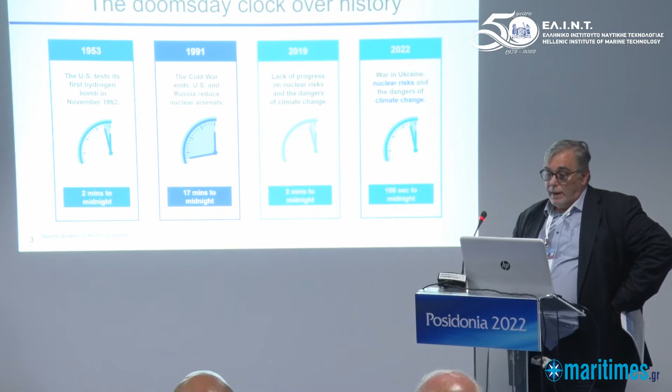In 1953, the main issue was the atomic bombs, hydrogen bombs, and at that time we had 2 minutes to midnight. Next was the Cold War, 1991, with 17 minutes to midnight. Next was 2019 with the nuclear treaty, that was 2 minutes, and in 2022 what they have said is that the Ukraine war risk and climate change give us 100 seconds to midnight. You understand what is the size of the seconds in this for them.

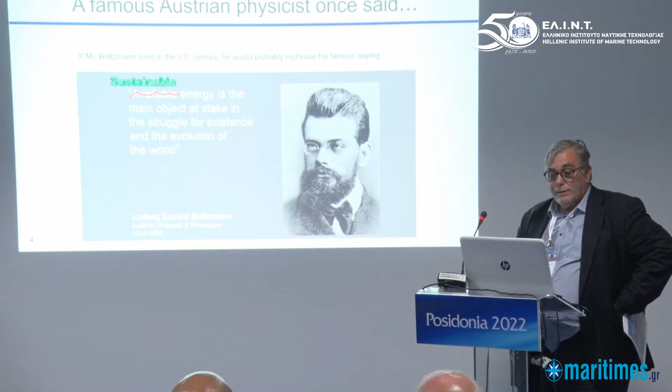Long ago, it was said that the available energy is the main object at stake in the struggle for existence and the evolution of the world. That was somewhere between 1844 and 1906. If we change the first word in this saying to 'sustainable,' I believe this is what we are faced with today.

We are at the turning point. There have been a number of conferences discussing climate. We had the Paris Convention, we had the Glasgow meeting, and we had the Davos meeting very recently.

We have an estimation that was done a long time ago by Gabrieli and von Karman. What they have said, and what we believe as people of the shipping industry, is that shipping is the most efficient and less polluting form of transport, in terms of emissions.

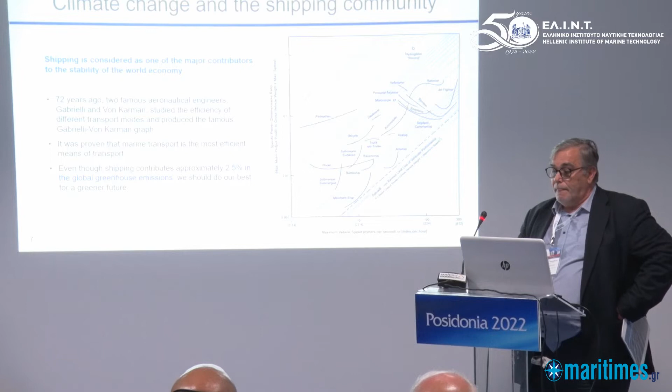We have the SOx emissions. This has already passed, but it's still recently we see a revival of the intention to fit scrubbers. The main reason for this is the price differential between low sulfur and high sulfur fuel. We have the NOx emissions, which are creating quite a few technical issues for the designers and manufacturers of the engines. And we have greenhouse gas emissions, which in my opinion is the most serious issue and the one that has to be tackled first.

There are a number of goals set up by IMO. Unfortunately, the IMO, number one, is a slow organization. Number two, their work was affected a lot by COVID, because they could not have face-to-face meetings and had to work in groups. But these are the measures that were announced a long time ago, and that are still on the agenda of IMO. We have the Energy Efficiency Design Index for new ships.

I calculated, just for fun, the EEDI of the Titanic and the EEDI of the Liberty ships. We go down from 55 to 24 with the Liberty ships. Then we have a very interesting ship, the Europe in 2002. That was a ULCC delivered 20 years ago that could meet the EEDI requirements of today. The reason for this was that the ship was large.

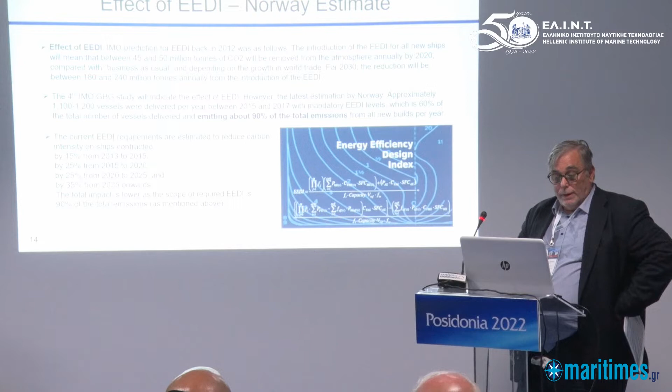450,000 deadweight. You can see some calculations for ships that are being delivered more recently. This is the same table form. The effect of EEDI as calculated by Norway, not a very recent calculation, but their estimation was 15% to 2015, 25% to 2020, and 35% to 2025.

EEXI, I think it's the discussion of the day, because it will take effect soon. What you can see on the table is what is required for different ships, different designs of ships. And this is the CII, and we have to say it is the first time that ships are ranked depending on their actual emissions. It's not a design index, it's an operational index.

This is an estimation from ABS on how the EEXI will affect the existing fleet. 82% of the bulk carriers have to do something, 80% of gas carriers, and 78% - sorry, I'm reading the CII. For the EEXI, it's 87, 88, 85, and 95, a little less for the CII and a little less for the different categories of ships.

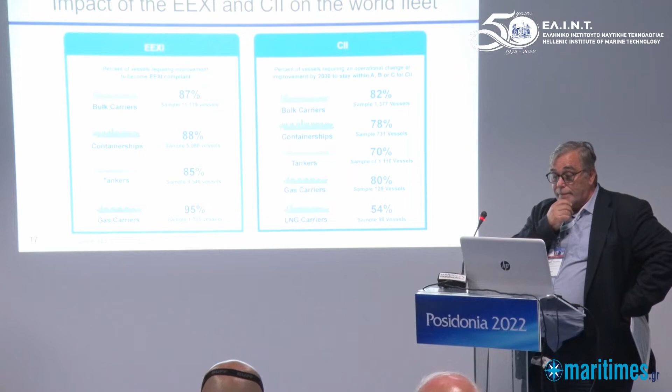What are the prospects? One of the problems we have is that apart from the CII, the whole industry has to improve. To 2050, it's 30-50% or 40-70% per ship, as IMO has said.

Prospects for population growth - although yesterday a report was published saying all these have to be revisited - but according to the latest projection by the United Nations, the population of the planet will increase by 22.52% to 2050.

I was in a seminar maybe two years ago with a few oil majors, and they were all smiling. When I asked them why they smile, they replied: because we estimate that energy consumption will go up, not go down.

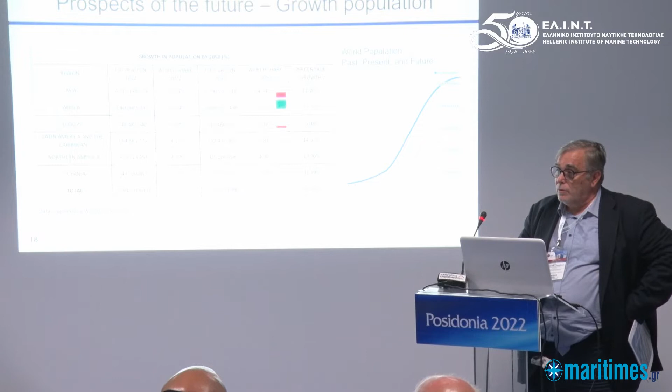So this is the future growth. You can see it also by continent. Europe will go down, Africa will go up a lot, South America is projected also to go up. And the Australians cannot keep their population at 22 million for a whole continent - it will also go up.

These are the projections against the United Nations for the seaborne trade. Some sectors, especially the tanker sector, are forecasted to diminish. Bulk carriers - they say the seaborne trade will increase. Containers will increase a lot. Gas carriers will increase a lot. The total growth is about 25%.

And this is not helping the industry, if the targets are set by industry and not by ship. GDP growth - who can talk about GDP today? I don't know, but these are the projected numbers.

Alternative fuels - I'll focus a bit on alternative fuels, and I will not talk about regulatory issues because they will be covered by the other speakers. What we have to evaluate today is 12 different solutions for ship propulsion. Keep in mind that for the past, around 70 years since coal stopped being used as the main fuel for ships, we have basically had one fuel, or say two fuels: MGO, distillates, and heavy fuel.

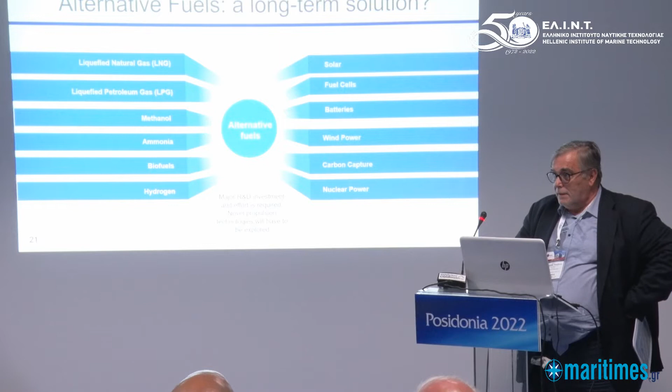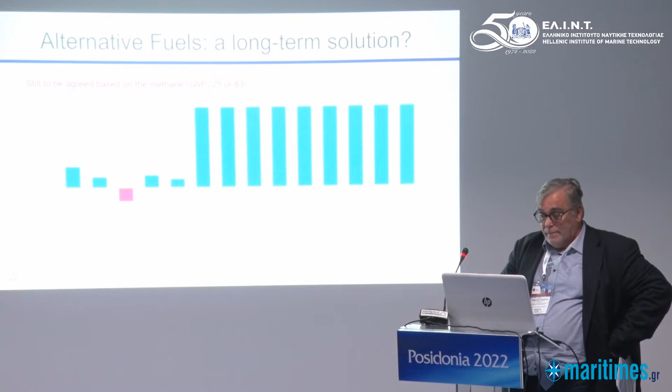Energy density, the properties of the new fuels - there are big differences between them. As an example, hydrogen will need 4 times more space to store, if you can store it at a temperature of -253 degrees.

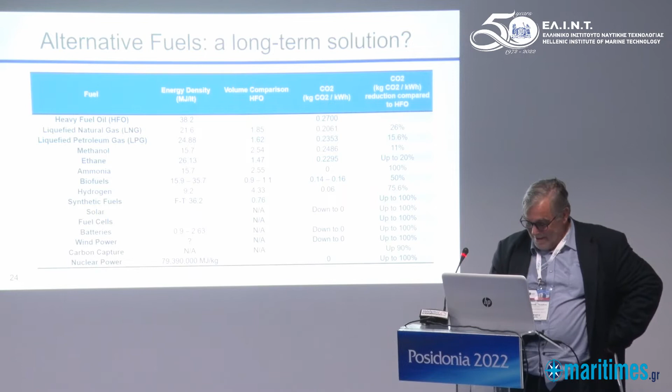Liquefied natural gas - some people like it, some people hate it, I'm not going to mention names. But it seems that it is the closest solution to improving emissions today. I believe that LNG is a transient fuel. It's becoming different if we talk about blue LNG, green LNG, or what can be developed in the not so far future.

LPG - I don't think LPG will help in my view. It's only about 15% reduction in greenhouse emissions. But LPG may be a solution for LPG carriers, and there are ships on order today, a few of them already delivered, that are using LPG successfully.

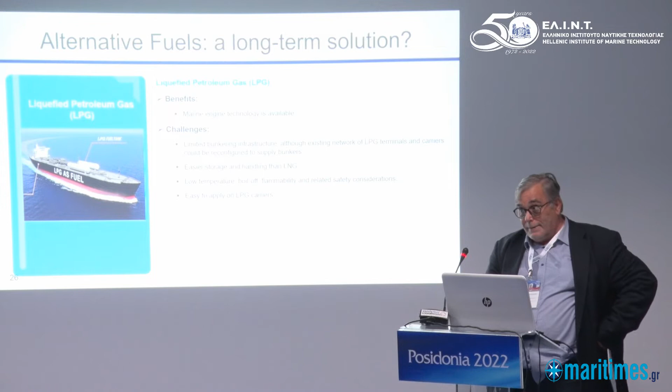Methanol - a question mark if it will be available worldwide. It's more easy to burn than other fuels, you don't need many modifications on your engine, and handling is a small issue. There are orders for methanol vessels by Maersk, by Hapag-Lloyd, and still there are discussions about ordering more ships with methanol.

Ammonia - there is one test engine that has been installed in Denmark by MAN that will start testing, from what I understand from the MAN people here, in August. They say that they will have an engine ready by 2024. I think this period is a bit short to test the engine, to produce the drawings, and to test it in service. It seems that if we talk about two-stroke, this is the closest solution for a new fuel, and this is the timeline of MAN as published 10 days ago.

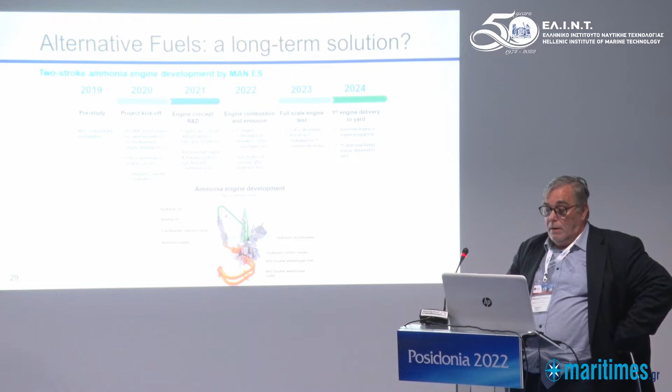Biofuels have the advantage that you can mix them with heavy fuel, so if you want to reduce your emissions by 30%, you can add 30% biofuel and you are okay. My personal view is that the targets should not be 30% or 50% - we should have a target of the maximum possible reduction of emissions, and not stay with predetermined numbers. Biofuels have been tested on board several vessels, but they are not available worldwide at this point. And there is, I don't know if I can call it the ethical issue, of whether production of biofuels will reduce production of food, and food is something that we need.

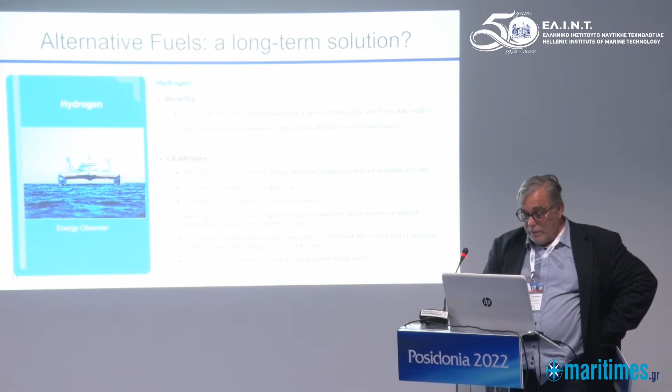Hydrogen is very difficult to handle. There have been no two-stroke engines designed until now with hydrogen. I understand there are small four-stroke engines utilizing hydrogen, and recently Wärtsilä have tested hydrogen on medium power four-stroke engines, and the results were quite encouraging. Hydrogen is a solution - producing, storing and handling hydrogen is difficult, but there are solutions to produce the hydrogen on board.

As you understand, all these are new technologies, and they have to be well tested before applying them on board. Nobody wants to see a repeat of what happened with the scrubbers and the ballast water treatment systems. What we have to do is monitor all the emissions - it's a bit different than scrubbers, a bit different than ballast water treatment systems.

Synthetic fuels - I don't know if you know it, but the German army was using synthetic fuels during the last years of the Second World War, and it was a successful test, but they will be expensive and intensive labor to produce.

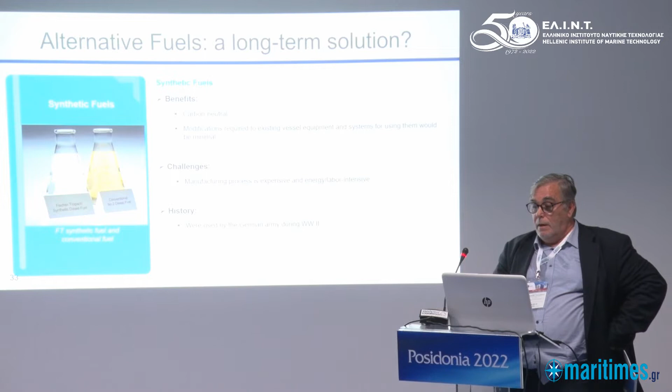Solar may be a solution, a backup solution. I don't believe that we will see solar-powered ships soon.

Fuel cells have been tested in military applications, navy applications. It's something that is coming, but the cost at this moment is 7 to 8 times more than a conventional propulsion system.

Batteries - we discussed, where I work, the possibility of using batteries that will last for 2 days for a 10 megawatt power on a reefer container, high reefer capacity container ship. The cost of the batteries was 104 million, the cost of the ship was 94 million. So, still early.

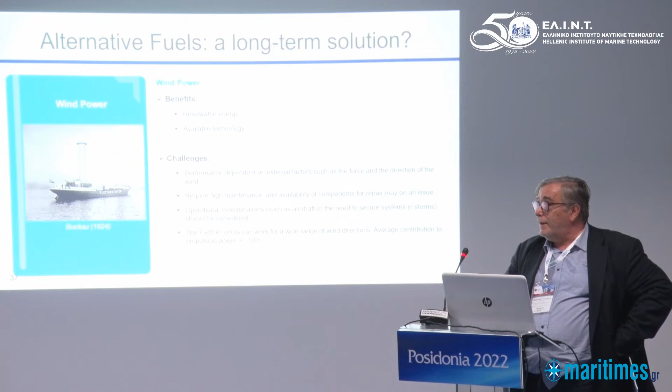Wind power, I think, is coming. We all talk about Flettner rotors. If you look at the picture on the left, it's not a very modern solution. The first Flettner rotor was produced and tested in 1924.

What rotor manufacturers are saying now is you can improve propulsion efficiency by about 1% per rotor, at a cost of 700 to 800 thousand US dollars.

Nuclear power, a few years ago, was promoted by one of the classification societies. Then somebody told them to stop, and they stopped. Now we have the same discussion again.

There are new technology nuclear reactors called molten salt reactors. They use fuel enriched with uranium or thorium in molten salt at a temperature of 450. They have two advantages: the enrichment is too low, so the nuclear fuel cannot be used to produce weapons. Number two, if there is a leak, the temperature of the fuel will immediately go down and the reaction will stop. So they are considered safe, but we have not yet seen a prototype reactor.

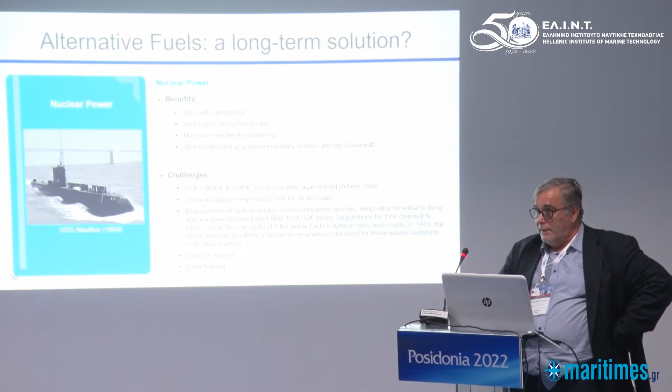Carbon capture is something we will have to discuss. My personal view is that the solution to many of our problems will be carbon capture. There are about 15 companies today trying to produce an efficient and cost-effective carbon capture system.

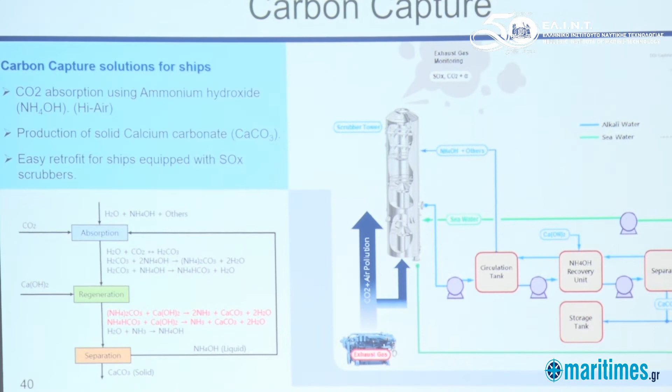The theory is that using chemicals such as ammonium hydroxide or amines, you can either liquefy the CO2 and deliver it to shore facilities in liquid form, or reduce the CO2 to solids. The solids are calcium carbonate, and they say—though it has not been regulated—that calcium carbonate can be thrown directly into the sea without causing any environmental problems.

The other method, for ships fueled with LNG, is to use the cold energy of LNG. We have to heat the LNG before sending it to the engine, and that cold energy can be used to liquefy the CO2. The temperature of LNG is minus 160, and the temperature required to liquefy CO2 is about minus 52, 53. So technically you can do this, but what is the footprint, what is the cost? It's still to be seen.

Small engines have been tested, and carbon capture has been proven successful on them. There are three ships at this moment provided with experimental carbon capture systems. One is in North Europe, one is in Japan, and one is in Korea.

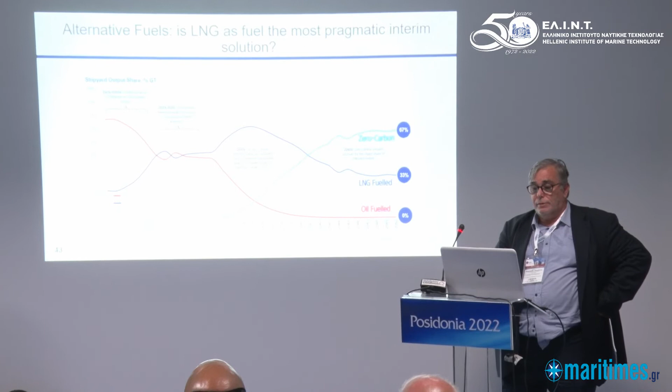It can give us a solution. These are the three solutions I already mentioned. This is the path if we go for LNG.

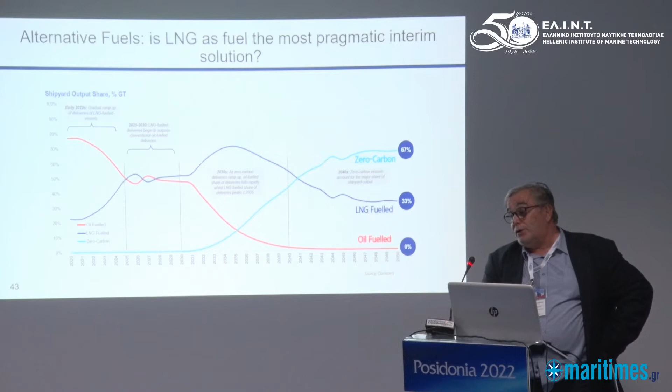There are many non-governmental organizations and individuals that do not like the idea of LNG. A report was published recently about the cruise vessel AIDA, which I saw yesterday—it's also calling at Greece at this moment. They were saying that the use of MGO was better in terms of emissions than using four-stroke propulsion engines with a high methane slip.

And these are my questions to the shipping coalition that produced this report and sent it to IMO: what will be the cost? This is a study that was published in 2020.

This is a simple Ultramax bulk carrier—a concept design, as you understand. Nobody has ordered such a ship. It has a sail forward, solar panels on the hatch covers, batteries, and LNG propulsion.

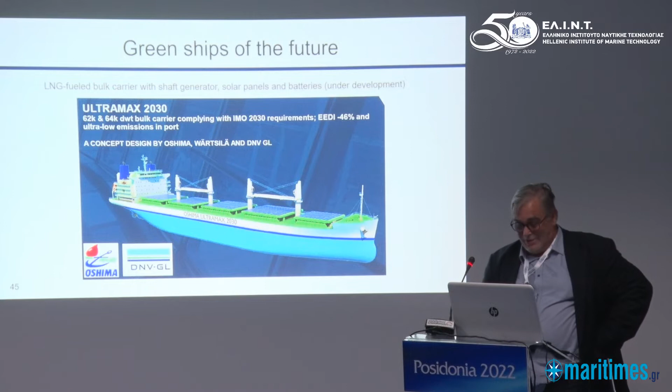And that's about it. The estimated cost of this vessel—I understand prices in shipyards are market driven—but the estimation was that this ship would cost, two years ago, two times more than the cost of a regular Ultramax at that time. The cost of an Ultramax has gone up 30% since then, maybe more. And this is where the traditional cost is.

Conclusions, my conclusions—I think we are all willing to discuss them. We must have a holistic approach to emissions. It's not only SOx, or NOx, or particulate matter, or CO2; we have to look at them in a holistic approach.

We need green technologies to be developed, and this is where we also need the support of governments. Governments should support green technology research and development. Reliability is important for marine equipment—we cannot have ships that break down every second day, although this will increase the manpower demand for all engineers here.

New technology, as I already mentioned, will increase the cost of the vessels, and I believe there will be problems with maybe not the high-end Greek companies, but the traditional, more or less traditional Greek company with, say, 2 to 15 ships. Investment will be more difficult for them. Understanding the technology will be more difficult for them.

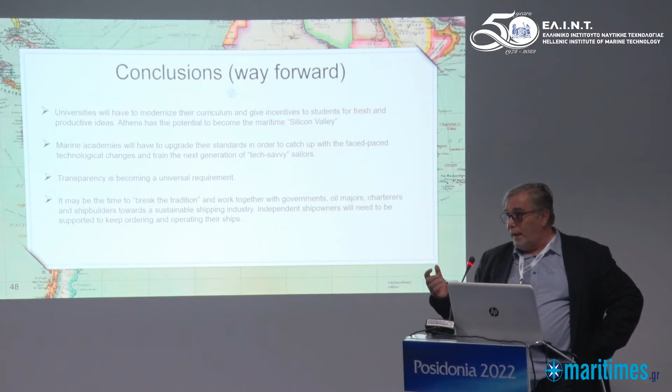What I forgot to mention before, because a lot of people will say nuclear, who is going to run nuclear ships? Part of the service that the company that will produce the nuclear reactor provides is that they will have 2 nuclear reactor engineers on board for the whole life of the ship. The crew will not deal with the nuclear reactor.

We need better education. We need the universities to look forward, to improve their curriculum, to improve whatever they teach. We need better marine academies for the people that will sail the ships.

And I'm not in full support of what we call autonomous vessels. I think for the first decade or so, autonomous vessels will be shore controlled. They will not be autonomous. Somebody will have to see what they do.

Transparency is important. We have to talk to each other to reach commonly approved solutions. At this moment, I think splitting our research capacity into 10, 12 different fuels is not helping, but we have to do it.

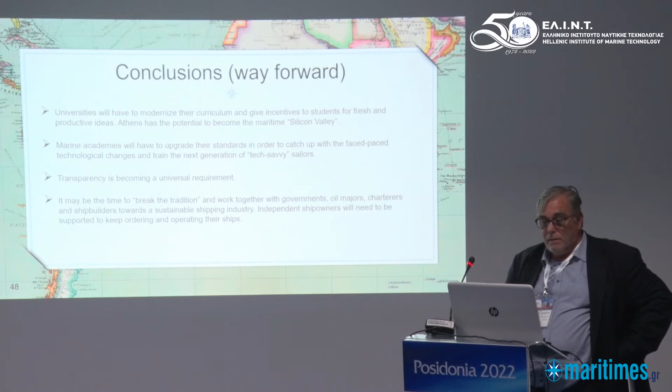Time to break the tradition, of course. I think everybody has realized this now. Shipping cycles will get longer, this is my view.

And the factors that will affect shipping a lot, as I mentioned already, is the cost of the ships, the cost of the fuel, and how well we can cope with new technology and digitalization.

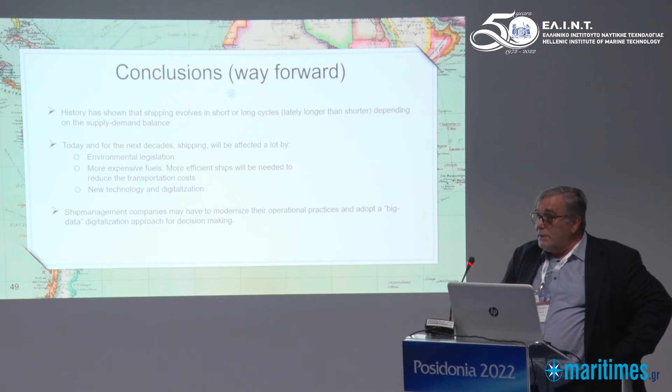Ship management companies, we will have to upgrade what we do. We need, as I said before, to also enhance the reliability and maintainability.

Supporting LNG a bit, I think LNG is a solution that can be applied at this moment, and stay there for a transition period for the next 10-15 years.

Well-to-wake theories, I believe, will be discussed. My personal view is that shipping should not be held responsible for what is happening until the fuel is on board, but it seems that there are new trends developing.

That's about it. Thank you very much.

Fradelos, I'm working for ABS. I'm head of the Regulatory Affairs Department. I joined ABS a few months ago.

We are responsible for following up the IMO developments, the regulatory developments in IMO, and passing this information internally to update our rules, our process instructions, certificates, etc. Of course, informing our clients and trying to let them know about what is happening and how we can support them. But also my department is dealing with the flag administrations, the agreements and the authorizations to do our statutory work. And we are also coordinating the activities in IACS.

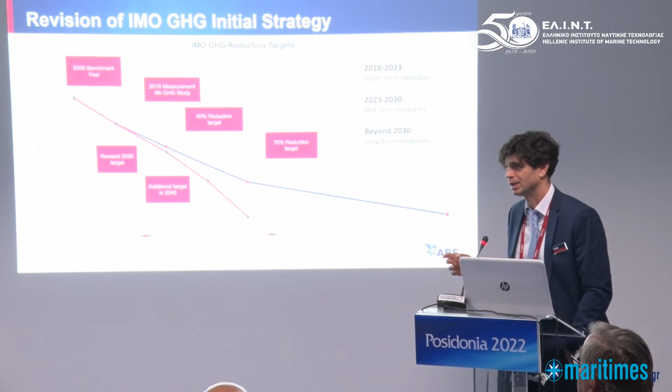Actually, this week we have the IMO MEPC 78 meeting that's currently going on, and we will give you some latest discussions. So the first thing which is very important in the regulatory agenda is the revision of the IMO GHG's initial strategy. The discussion started from the previous MEPC meetings and will continue.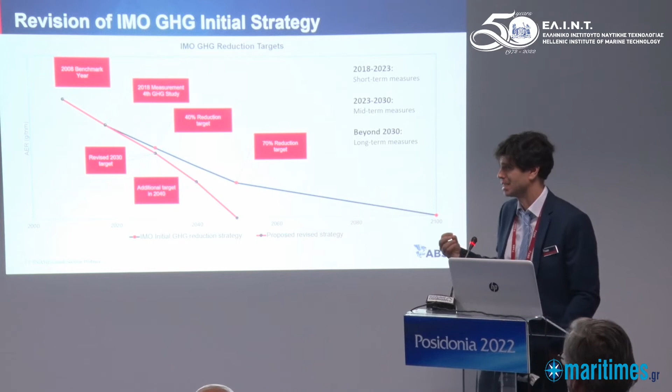I'm sure we are all familiar with this trajectory line that IMO introduced within the initial strategy for decarbonization within the century, and we have two targets in 2030 and 2050. Now, however, there is a discussion and increasing support to go to a stricter trajectory line to have zero emissions by the year 2050.

And a new target you can see there in the year 2040, and there is big support by IMO influencers like the United States, Canada, Europe with all EU members, Australia, New Zealand, and it seems that during this meeting, discussed on the second and third day, they decided to move forward and need concrete proposals about the text to revise the strategy. This will be discussed at the next intersessional working groups and the MEPC, to be finalized next summer in MEPC 80.

And of course this is a very important development which will affect the effort that we will have to put all together for the decarbonization.

The draft G5 guidelines have been approved yesterday, so these guidelines now introduce some correction factors trying to, let's say, make the whole CII implementation framework more fair.

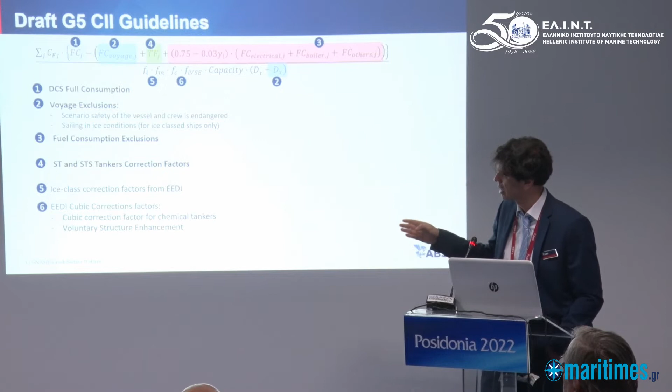Okay, so there are some voyage exclusions, considerations for tankers, correction factors against on ship-to-ship, ice class, and correction factors for chemical tankers. These have been approved. We have also amendments on the EEXI guidelines that have been approved. You are going to see a revised set, we call 2022 set, for the EEXI guidelines.

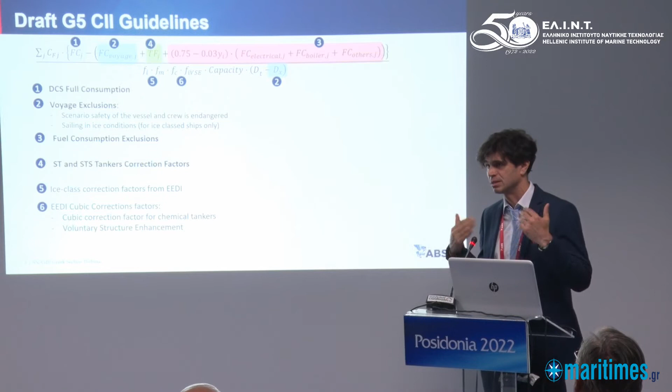Now the changes there are actually introducing the in-service measurements for vessels that would like to go for sea trials and produce a new speed power curve. This is also a very important discussion within IMO.

This is related to the life cycle GHG intensity guidelines, which aim to incentivize the uptake of zero and low carbon fuels. It has been mentioned earlier by Mr. Hatzigrigoris about the well-to-tank and tank-to-propeller emissions. As you know, currently through the DCS we report our tank-to-propeller emissions. We have the carbon factors and we're reporting this part of the emissions.

We will continue, and for international shipping, only the tank-to-propeller emission will be accounted within the IMO inventory. However, we are going to have information about the well-to-tank part, so ship owners can make informed decisions about the fuel they are going to change. But for the tank-to-propeller part, as you can see there, now we will have the introduction of the methane slip.

Also mentioned by Mr. Hatzigrigoris, and as you can see there are already some proposed factors to calculate the methane slip and the equivalent methane emissions, and also the nitrous oxide. And what is also very important to note is the introduction of the source factor that you can see there, multiplied by the carbon factor.

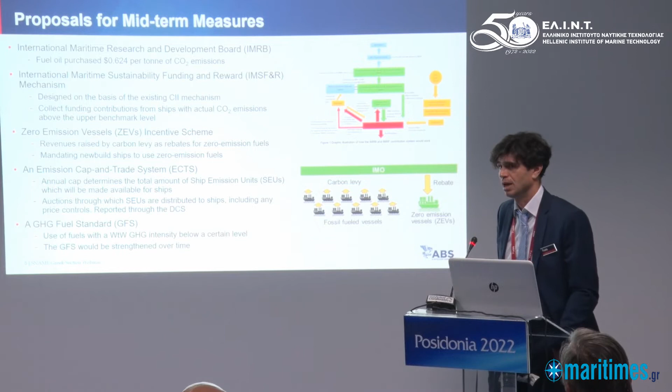We also have this proposal from Japan, the zero emission vessels incentive scheme that you can see here. Those ships that will continue to operate with fossil fuels will have to pay a levy, and then these funds will support those first movers, ship owners that will invest in zero emission ships. Actually, in their analysis, Japan says that less than $100 per ton of CO2 equivalent will be sufficient to support and incentivize the uptake of these zero emission fuels.

We have the emission cap and trade system. This is supported by Norway. It's actually a cap on the emissions specific to each ship, and a ship will have to pay for these emissions units, the allowance to emit in the atmosphere. This is similar to the EU ETS that we are going to discuss later on, which is coming from Europe, and the GFS, the fuel standard.

This is the proposal by the European Commission and all EU members. Actually, they say we need to set a limit on the GHG intensity of the fuels, the carbon content of the fuels, and we have to reduce this carbon content over the years.

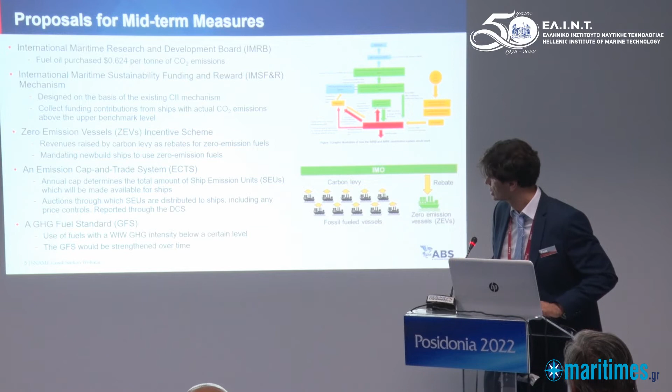So moving to the next point, this has been discussed on Monday and it has been approved, so it will go to the next MEPC meeting for adoption. This is the Mediterranean Sea designated as a SOx ECA from 1st January 2025, so ships will need to use 0.1% sulfur content fuel while operating in this area, or SOx scrubbers.

This is under discussion. There is a recognition that ships operating in ports with challenging water quality have problems with filters clogging and difficulties managing the ballast water management system. This is under discussion in a review group these days, reporting back to the MEPC committee in plenary today. We are expecting their report, and there is a proposal that ships facing such problems be able to bypass the system while in port, when they are outside in the ocean, to carry out sequential exchange and treatment, and then have clean ballast water.

This is my last slide, related not to IMO but to regional requirements coming from Europe. We have the EU Fit for 55 package. Europe has recently increased the level of ambition for reduction of GHG emissions from 40% to 55% by the year 2030 compared with 1990. That's why they came up with a legislative package called Fit for 55. We have two committees currently in the European Parliament: the TRAN committee, leading discussion on the FuelEU Maritime Regulation, and the ENVI committee, leading discussion on the EU ETS. Yesterday we had the vote in the Parliament, but we had an unexpected, unpleasant development where the Parliament was not able to vote and agree on the proposal by the ENVI committee, so it will take more time now to see when the EU Parliament will be able to reach an agreement on the ETS.

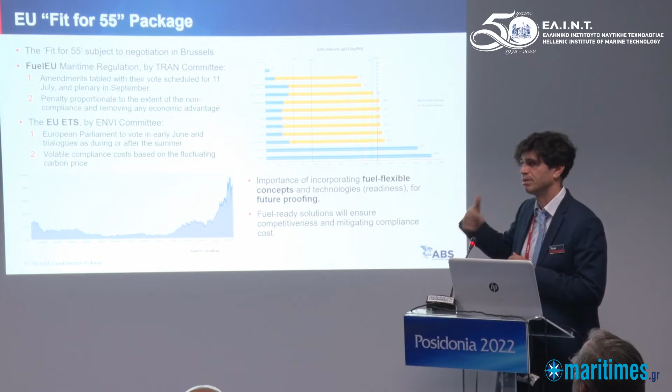The FuelEU Maritime Regulation is a totally different concept. The ETS is based on tank-to-propeller emissions, while the FuelEU Maritime Regulation is based on well-to-propeller emissions, so it considers the whole life cycle of the fuel. They are going to set a GHG intensity limit based on data collected through the EU MRV for the year 2020. The limit is expected to be about 90.3 grams of CO2 per megajoule, and they are going to reduce this limit over the years, every 5 years. You can see here in the graph an estimation of how the different fuels perform based on the limits that will be reduced over the years.

You can see here what was previously mentioned by Mr. Hatzigrigoris about the 4-stroke dual-fuel engines — they do not perform so well, actually worse than liquid fuel. However, you can see there that LPG and LNG on 2-strokes, based on the default values, are actually a compliant fuel up to 2040, based on the default values we have available so far. And this completes my presentation. Thank you very much.

We are the brain power. We shouldn't be supposed to know what we are doing because we are working as a brain for our customers.

It's a private-owned institute. We have 11,000 plus people, and out of that, 7,000 are researchers, scientists, engineers and technicians, and then 1,200 are software engineers and 600 are fuel cell developers.

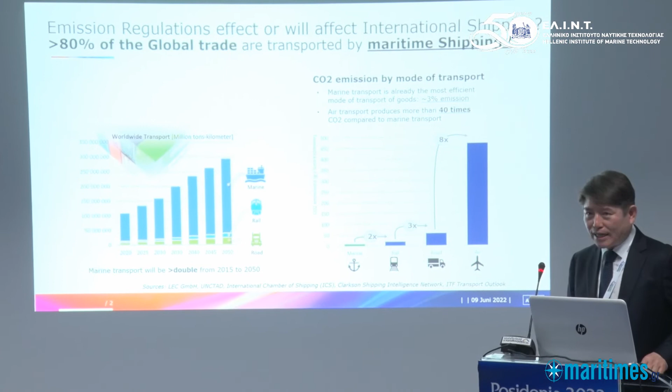Thank you very much. I would first mention the role and importance of maritime transportation. We are carrying more than, in reality, over 87%—okay, there are differences, but you could easily say more than 80% of all trade is done by the maritime industry, and we are emitting only 3%.

It's really unfair that we are blamed by many institutions. You can compare: we are 2 times better than rail traction, 6 times better than truck, 40 times better than air freight, but we are still, let's say, blamed. The why, I will explain a little later.

To solve our common issues, I know right now you have a burning problem, because your burning problem is to comply with CII and EEXI. This is your burning problem. I know you have to solve this, you are totally focused on it, but very soon you will have another burning problem coming, and this is what we have to be aware of.

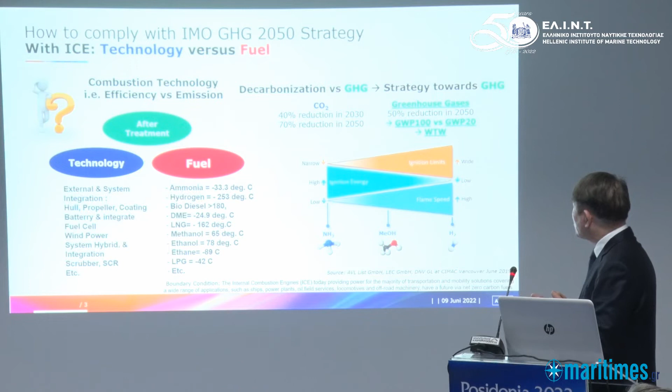And another one already mentioned many times is well-to-wake. This is another one I will not mention because it will be repeated.

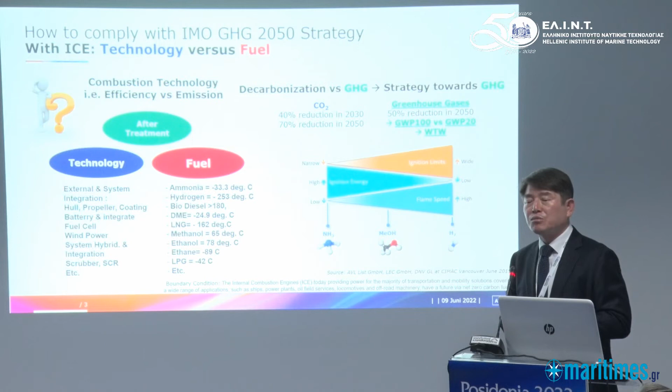And then to summarize, we can say there are three clusters on how to solve this. First is internal measures—why not just measure it by the technology? This is one cluster, but we have recognized that this cluster of technology alone cannot solve the problem. That's why we need help from the fuel.

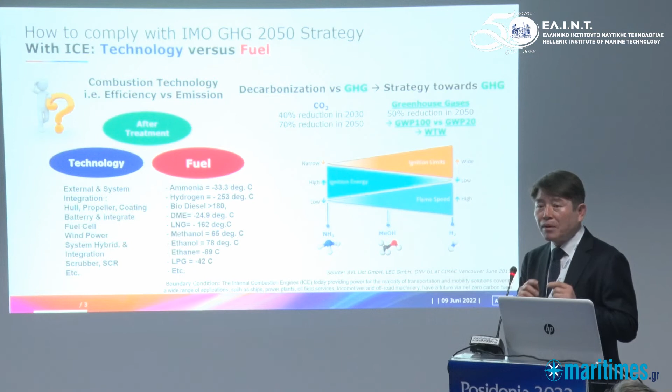That's why we are all discussing different fuels. But that is not enough, I would say. So we need another way of after-treatment. This could be carbon capture and utilization as well. So we all have to, now, to solve or comply with our common issue, increase our communication and cooperation.

This is extremely important. And this is under the condition that the internal combustion engine will remain as the main drive for the power of the ship. Because as I told you, it's still 3% of the whole market. So there is another big windmill which drives this to continue as a prime mover in our society. That's why it's very hard to believe this will disappear any day.

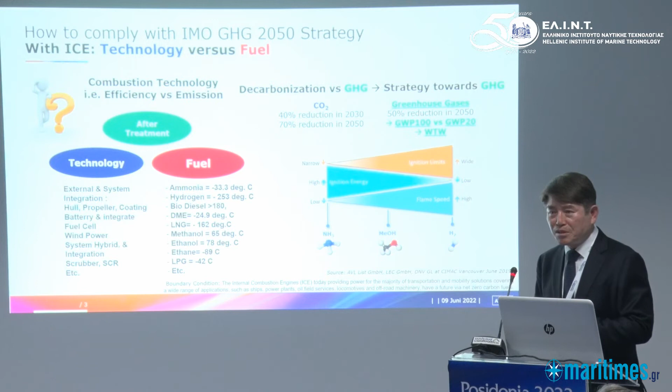We calculated the average power demand to be 30 gigawatt hours. With this calculation, if we use electrification, you need 60% of the total mass of the ship to be battery. So what can you do? To increase your volume for cargo, of course you have to decrease your battery.

And then for another calculation, we cooperated with the Fraunhofer Institute in Germany and also Technical University of Graz LEC Center, which we are also part of. They calculated from present technology, and that resulted in 100% of the mass. So basically, the ship can only carry its own battery. That's it—that is the two calculations.

And these two very simply prove the physics, actually, because the internal combustion engine carries only 2% of the energy, since 98% is coming from the air. You see, the internal combustion engine is just converting energy from the air, combining carbon from the fuel, and then sending it back to the air. So it is a matter of how to clean them.

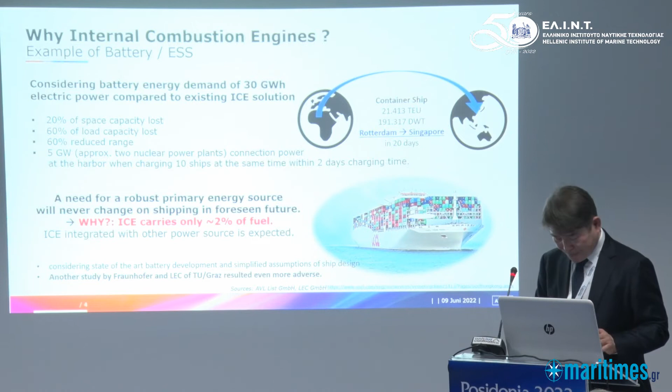And we have summarized what could be the technology to comply with all those three clusters, beside the technology itself—meaning the fuel side and the after-treatment system. And we would say we are ready. All this cascading knowledge has been developed, so we are ready to comply with any kind of demand for fuel and also after-treatment systems. Carbon capture is one of the really interesting, promising technologies which we can combine all together. So I will not go into detail here.

And then just a quick look at the fuel, how this fuel in maritime has developed or evolved. It's strange enough—when the first steam engine was developed in 1812, solid fuel, the coal, served for exactly 100 years until the Selandia launched with the first diesel engine in 1912 from Burmeister shipyard.

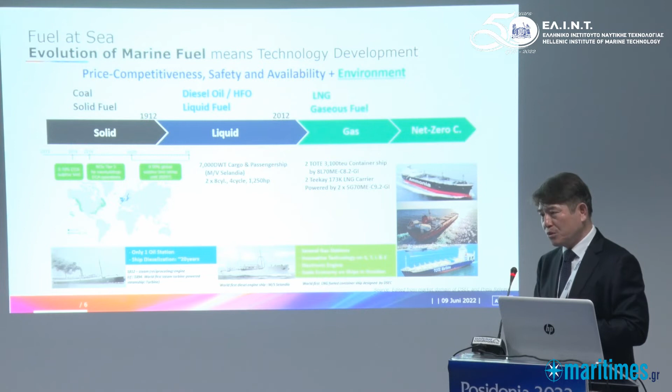And then I was myself a major contracting partner on the 6th of December 2012, for the first real commercialized ocean-going big-sized ship with LNG fuel. So it is another 100 years. I don't know why each time it's 100 years, but that is the case. And then we have to discuss the new fuel, because so far the condition to be a maritime fuel should be bulk.

That means very economical, and the ship should be able to sail anywhere in the world, so it should be globally available. So availability is very important. Of course, safety is no need to mention, but now the environmental aspect is one of the most important among all.

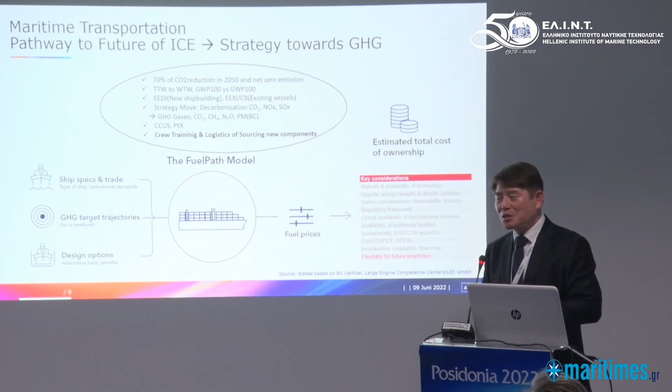That's why I would really emphasize that this Hellenic Institute, this association, should discuss together as a group, and exercise your power to press, or rather request, more cooperation from those supplier associations. Let's talk. What is your plan? What is our demand? How can we compromise? How can we secure this supply chain more safely? This is another very important point I would like to mention.

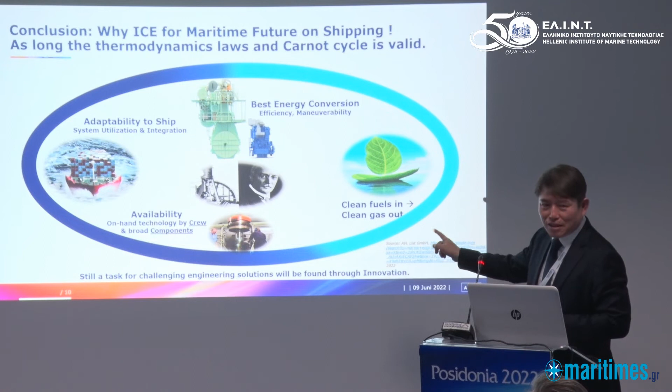This is much better explained elsewhere, so I will not mention it. For this simple reason, I believe the internal combustion engine will prevail. It's very simple: clean fuel in, clean gas out. Also, the knowledge about the engine, we know what's in there and we know how to handle it, and we have a lot of people who know that. I will end my presentation this way.

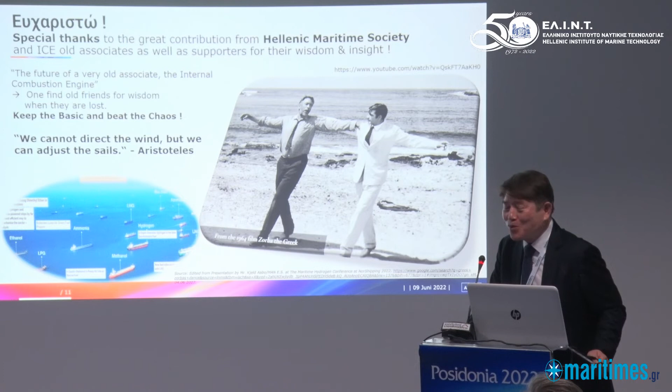Many people, when there is a storm or it is windy, say we have to think about why we have a sail. It's not the time to think about the sail itself, it is time to think about how to adjust our sail. This was said more than 2,000 years ago in this land, as Koutoulakis has already mentioned. So let's see, our very old associate already told us the future of the internal combustion engine. Thank you very much for your listening.

Engineering, National Technical University of Athens, and I'm going to present design aspects related to ship energy efficiency. I will try to be short, and the presentation has 3 parts.

First, I will summarize basic design measures, focusing at a high level. Second, I will provide some indicative research activities at NTUA. Third, I will give some case studies related to performance assessment of design measures in real operation.

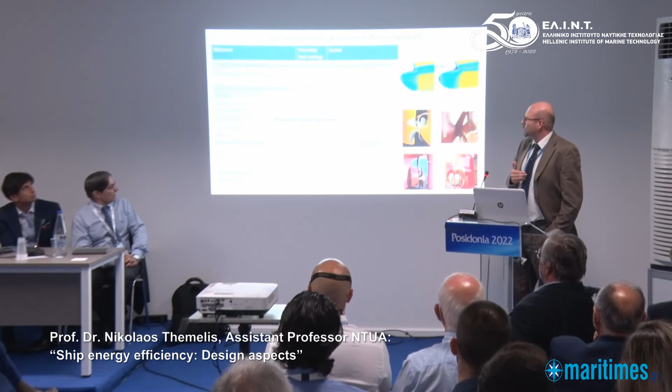We have some mature measures, which I will call short-term measures, that aim at improving fuel efficiency. If we focus on hull and propulsion, we have 2 major categories: hull form optimizations that aim at reducing hull resistance and increasing propulsion efficiency, applicable both at the design stage and as a retrofit.

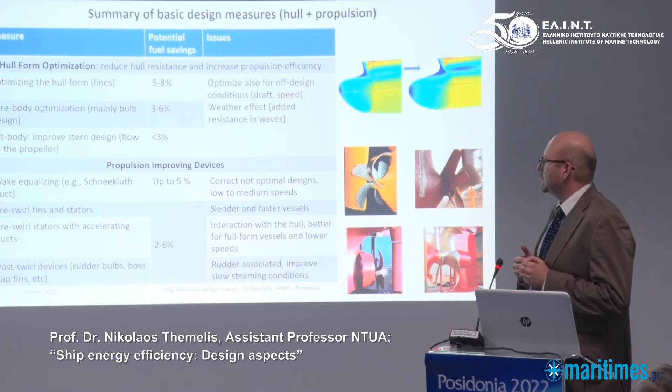The key point is to start thinking about optimizing at off-design conditions related to draft and speed, and also considering weather effects. We have seen that due to slow steaming, some designs are not performing very well. So we have a need for optimizations, and bulbous bow optimizations are a popular choice nowadays. At the design level, we also have to think about optimizing hull form more broadly, beyond industrial design optimization.

So this table presents some indicative fuel savings found from the literature and other studies. The second category is...

This concerns propulsion improving devices. It's also mature technology, and we have a lot of applications. In some cases, they try to correct some not optimal designs, so have some sort of ducts, for example. And such devices are not perfect for every design.

So for slender or faster vessels, you can have pre-swirl fins and stators. For full form vessels and for lower speeds, we have pre-swirl stators with accelerating ducts, like Mewis duct. And for post-swirl devices, we aim at improving slow steaming conditions. We have some rudder bulbs and boss cap fins.

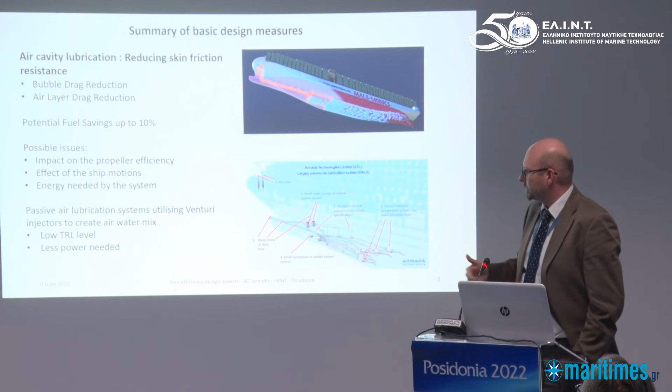Okay, now let's go to more research activities, research level technologies. Firstly, we will see some results from a project run at NTUA. It relates to hull form optimization.

The project is called TRAM, and its aim is to design a fully electric passenger catamaran ferry. In order to save space and need less power for the batteries, we have to optimize the hull form and the beam of the demi-hull to reduce the resistance. For this reason, we have used a CFD tool and an optimization procedure using genetic algorithms to find, for example, the optimum hull form or the optimum beam of the demi-hull.

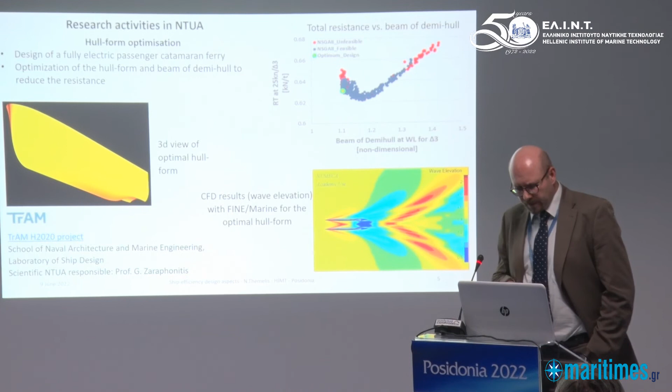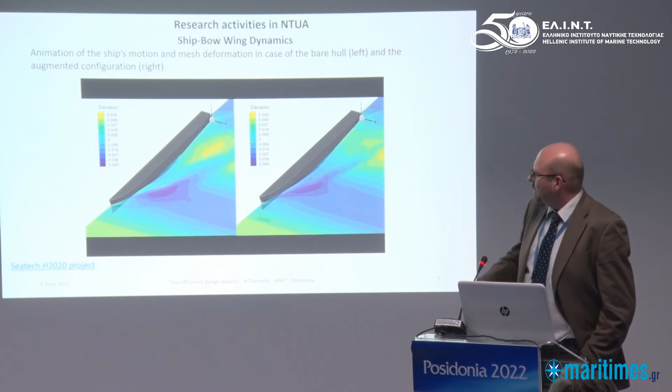We have also some numerical results. We have CFD results regarding the ship motion, both without the system and with the system, and you can see the reduction of the waves produced.

For the last part of the presentation, I think it's interesting to start testing the effect and performance of these systems in real conditions. We have several cases where such systems and measures are introduced, and then we monitor their performance, and we start asking ourselves, okay, where are the savings that have been promised? We present some case studies based on diploma theses that I supervised, which highlights the high level of our students here at the school.

So the first case corresponds to a container ship, and they proceed with bow modification and a propeller replacement. This is because they operate far away from the propeller's optimized design point, which was about 24 knots speed, and the operational range was decreasing to 15 and 17 knots due to slow steaming.

In order to evaluate if these design measures were successful, we have operational data, high frequency operational data before and after the retrofit. We utilize mathematical models based on machine learning techniques and feed-forward neural networks to estimate the main engine fuel oil consumption. The problem here is that the retrofit occurs simultaneously with hull cleaning during the dry dock, so some special treatment for the time is needed. We have a two-step approach here.

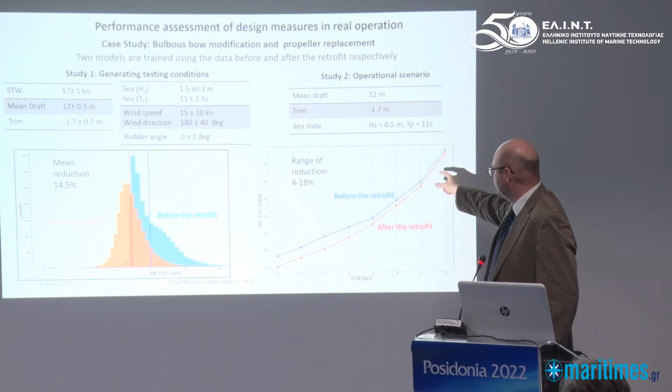We can see that we have a mean reduction of about 14.5%. If we concentrate on a single operation scenario, about the mean conditions for draft, trim, and sea state, and use the models to calculate the fuel oil consumption in terms of ship speed, we can see a significant reduction for the lower speed range, and this confirms the effect of the retrofit. For the higher speed range, this reduction is diminished. So indeed, there's a significant reduction showing the retrofit was successful.

The second case study corresponds to an air lubrication system. We have a gas carrier with real-time measurements testing the system operated and when it's closed. Here we have a preliminary analysis based on a thesis that is in progress. We have measurements with the system on and off. We have carried out normalization and filtering for moderate weather conditions, sea current also below 1 knot, and corrections for wind resistance.

Here we can see the power speed curves, the measurements derived from the system on and off. If we do the analysis, we have gross power savings by the system for a range of speeds, starting above 10% and getting lower for higher speeds. But importantly, we need to consider also the power needed by the system, and we have these values for this range of speed. If we remove this power, the net power saving is ideally about 4.5% for a range of speeds of 16 to 17 knots. This is an important amount, and if we find systems with lower operation power, this net power saving will be increased.

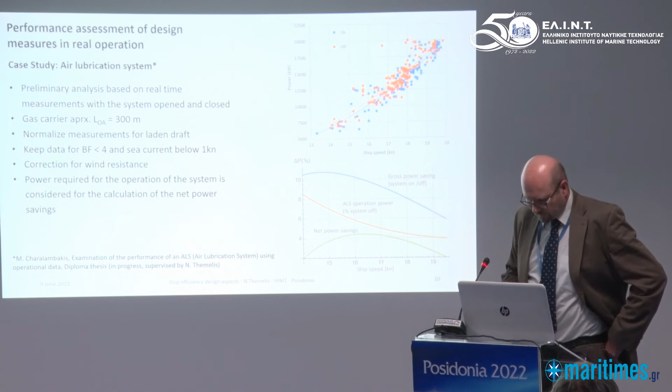Of course, the savings cannot compare with the fuel solutions. These are more short-term measures for existing ships, retrofits that can improve their energy efficiency. And of course, there's a real question: if we combine such systems, what is the benefit? This is not an easy answer because the problem is not linear, you cannot just add the percentage of savings. It's really interesting to examine what the real benefit is of implementing such systems in real operation.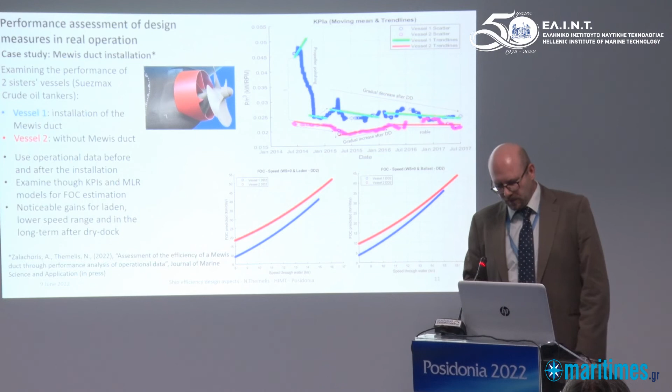So this is it. Thank you.

I'm Panos Zachariadis, Technical Director of Atlantic Bulkers for many years. I go to IMO as part of the Greek delegation for many years. I'm part of the BIMCO Environmental Committee and also a recent BIMCO group that made those clauses for the charter parties, the ETS clause, the EEXI clause. We're done with those and now we're finishing up the CII clause.

I just want to give you some news, because I don't even know if Mr. Lee knows about hydrogen. It has nothing to do with my presentation, but a couple of days ago I read in Bloomberg that hydrogen in the future may be said to be a greenhouse gas. I don't know if you know that, because we know hydrogen is not a greenhouse gas. When you burn hydrogen, it doesn't emit any greenhouse gas. If it escapes to the atmosphere, it doesn't warm the atmosphere. But the more scientists look, the more they find things.

What they found is it affects the life of methane in the atmosphere. We said before that the greenhouse gas potential of methane, if you look at the first 20 years, is 100 times worse than CO2. It's 28 to 30 times worse than CO2 over 100 years, but if you look only at the next 20 years, it's 100 times worse than CO2. The reason is that methane interacts with some other elements in the atmosphere, and its greenhouse effect reduces. So hydrogen, when emitted into the atmosphere, interacts first with those other elements, and prevents methane from interacting with those same elements. So in the future, that methane 100-year potential may increase, and hydrogen may be a potential greenhouse gas.

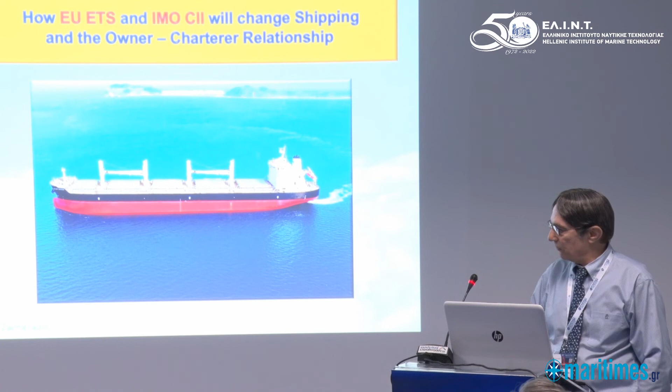So the result is there's no silver bullet yet. We don't know where we're going. Anyways, today's presentation, I'm not going to speak about how silly the IMO regulations for CO2 are. I've said that many times before, but they're here, and except for the fact that we have to live with them, they also have some good side effects. It's not all bad. The good side effect is we are going to need collaboration from now on, collaboration between owners and charterers, as we said before.

So starting with the EU ETS, Mr. Fradelos mentioned yesterday that it didn't pass. There are actually two directorates in the European Union: the DG Move and the DG Klima, the General Directorate of Transportation and the General Directorate of Climate Change. Those two actually fight between themselves a little bit. DG Klima wanted ETS to be applied to shipping. DG Move, because they know transportation, they know ships better, and they know that ETS is not the best suitable measure for ships, so they wanted a levy. Finally, in order to have everybody happy, we got both an ETS and a levy, and we got the levy in the Fuel EU.

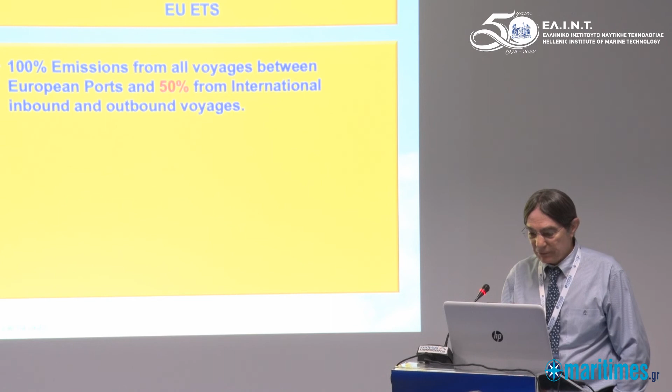So the EU ETS, I'm not going to spend too much time on it. For all emissions, if you're coming or going from the European Union, 50% of the emissions of the trip will have to be surrendered by allowances which you buy in the European carbon exchange. We hear a lot about Greek ship owners pressing the European Union to include in the ETS the responsibility of the charterer, because when you charter the ship, the fuel is purchased by the charterer, so he's the one doing the emissions, and therefore the charterer should be responsible for the allowances, not the owner. There were quite a few lines included in the revised draft, but I call all those changes cosmetic, because in the final analysis, the party required to surrender the allowances to the European Union is the ship manager. So once it's the ship manager, he has to get the allowances from the charterer. So it's not really that the charterer is regulated, it's cosmetic, what I call.

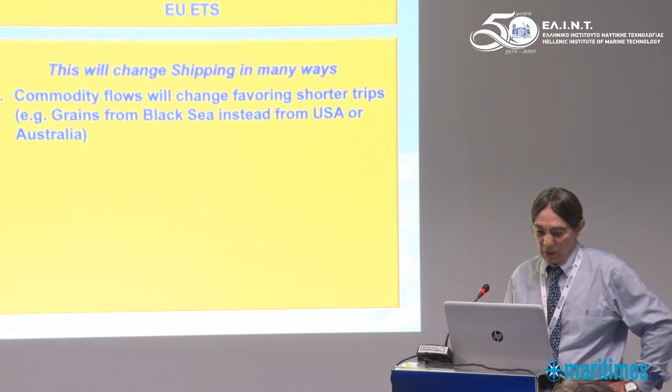Another side effect that's almost certain to happen is that countries close to the EU, like Turkey or Morocco, can have hubs where if you have a very long trip from Asia, you can discharge your cargo there, and then it can go further on to the European Union, perhaps with smaller ships. The European Union knows about this, which is called carbon leakage, but the problem is it's very, very difficult to control, because who can keep track of what cargo is loaded now in Morocco onto smaller ships for transport to the European Union?

And of course we all know that keeping track of an ETS system is a huge administrative burden, especially for small shipping companies. You have to keep track of your emissions, go to the carbon exchange and buy the allowances, and submit the allowances. All this is a huge burden.

And finally, this is actually in the BIMCO clause, the ETS clause. The owners want to be sure, if you charter your ship for one year, that the charterer will give you the allowances. So you better request the allowances on a regular basis from the charterer, not at the end of the charter, because if the charterer doesn't pay up at the end, you're going to have a serious problem with your ship.

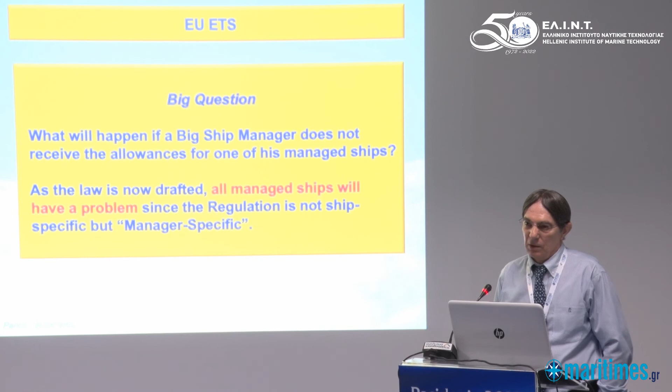And that's, I think, a mistake in the regulation. Instead of trying to lobby the European Union to have the charterer being responsible, it would be better to try to change the regulation from manager specific to ship specific, because we have all the data for the ships. We have IMO numbers, we have the EU MRV, the European Union knows all that data is submitted. So it would be more appropriate that the ship should be targeted.

And if you think about it, even if the European Union wanted to have the charterer responsible, they cannot do it. There is no database of charterers, and a charterer can be a charterer for one trip only—buys the cargo, finds the ship, and then the next day disappears. So this lobbying to have the charterer responsible, I think, is misguided.

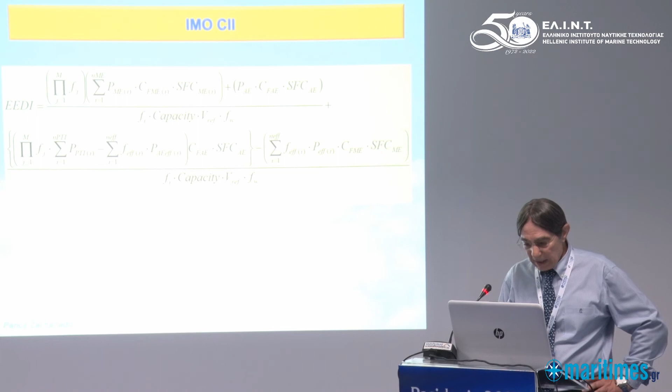Let me move to the CII, but what I show here is the actual formula for the EEXI. This is not the CII. I show the formula just to say that despite how it looks, the EEXI is very simple.

EEXI is just a limit on the power of the ship. Now, talking about how those regulations are going to change the relationship between the owner and the charterer: if you have a ship on charter and you apply EEXI, then your maximum speed changes. So you can describe in the charter party that, because of this new regulation, my ship, which before had a maximum speed of 14 knots, now has a maximum speed of 13.5 knots.

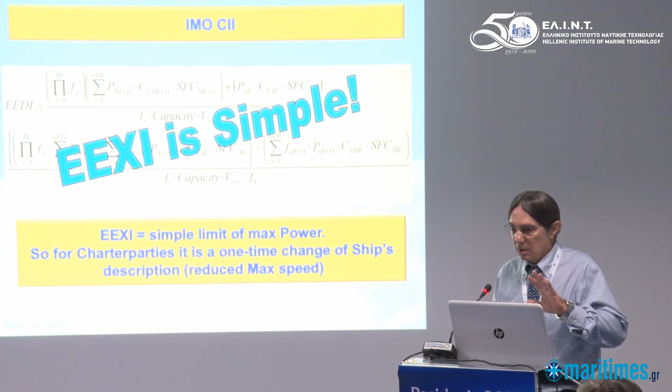The charterer has to agree to it because it's a regulation. Finished. That description of the ship is valid for the remainder of the charter, and actually for the remaining life of the ship. But this is not the same with CII, and that's where the problems come.

Practically, CII is fuel consumption by distance, and that has to stay within the CII range every year. And every year we're going to have a 2% drop of that CII line. So every year it will be more and more difficult to be within the CII range or above.

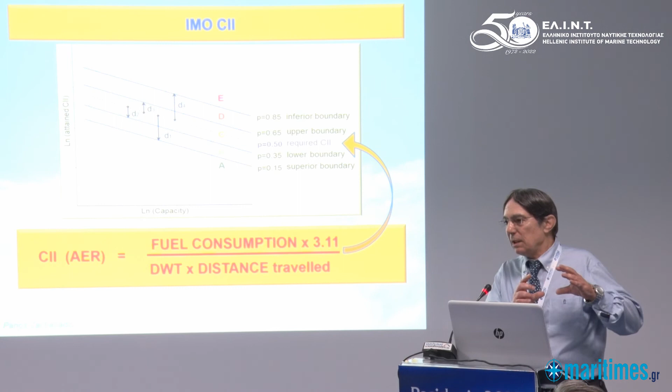Just a side comment: I mentioned CII regulations before, and we are rating the ships like refrigerators, but this is not a valid efficiency index for the ship. For example, you can have a very efficient ship that goes to a port, the port is busy, and it has to stay, let's say, for 15 days. Your CII index is going to be adversely affected drastically, and at the end of the year, that ship is going to be a D ship. Is that a real representation of the ship? No, of course not. That's why I don't like this kind of operational indicator.

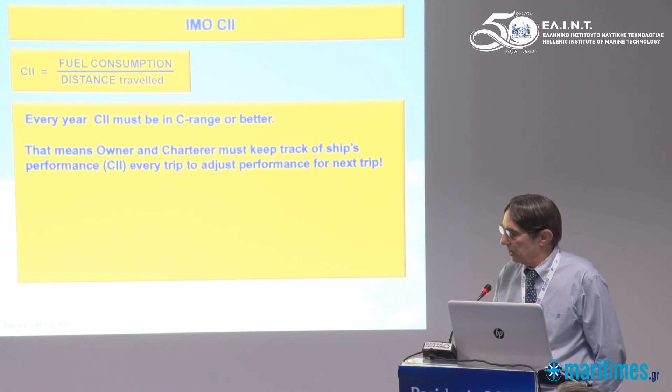So what does that mean for the actual operation of the ship? That the owner and the charterer have to be in close touch. The owner has to pass to the charterer all the data so the charterer can understand the CII rating of the ship.

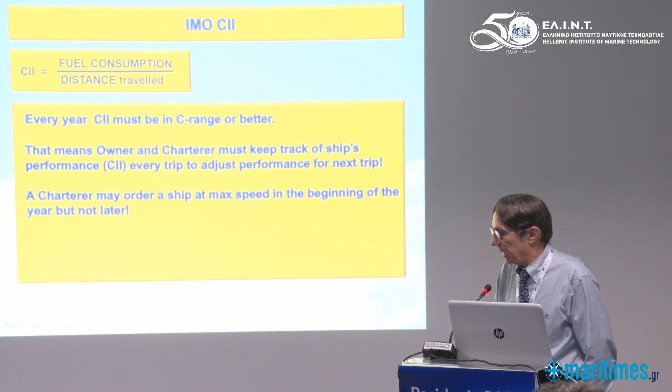A problem you can imagine: in the beginning of the year, in the beginning of the charter, a charterer can order the ship to its maximum speed, which is controlled perhaps by EEXI. But then for the next voyage, or for the next three months, the owner will have to say to the charterer, sorry, you cannot order that ship to that previous speed. Now you have to go lower, because if you don't go lower, I'm not going to be in compliance with CII.

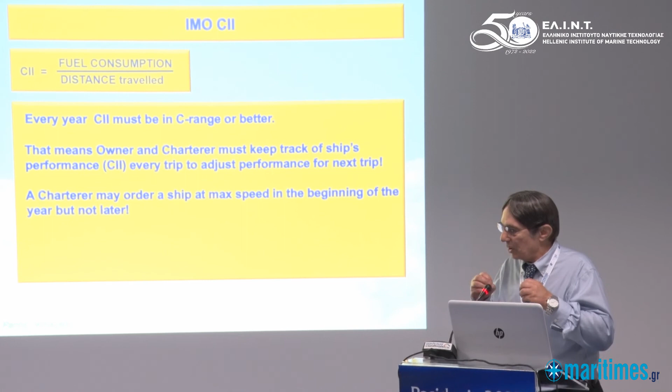And the charterer—this is practically a regulation addressed to the charterer, which is a first in the shipping industry. The charterer doesn't usually know about regulations that are applicable to him. So this thinking that the owner is against the charterer, with charter parties having clauses to protect one and clauses to protect the other, will change from now on, and there will necessarily have to be a collaboration between the two parties in order to comply with CII.

So this is how I see it changing from now on, and I think it's going to be a major change to have the charterer and the owner actually collaborating to achieve a regulation, because they will have no other choice.

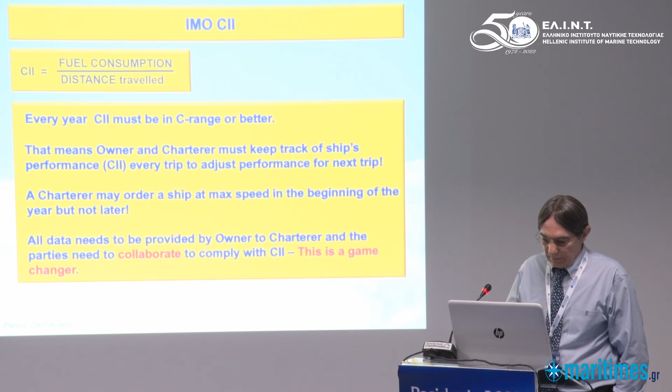The classification societies and the choices that IACS has made in recent times concerning these new regulations. As we saw, the IMO strategy for 2030 and 2040 will cause the carbon intensity of shipping and the total emissions to be reduced, and the targets are getting stricter and stricter.

But our view is that the initial requirements will mostly be complied with through efficiency improvements, like the ones we just described with CII and EEXI. But the further steps for the following years require real changes in the technologies.

We have heard about developments in the technologies being used, and this includes especially new fuels. Most probably new fuels will come to the market: ammonia, hydrogen, biofuels, synthetic fuels, but also batteries, nuclear power, methanol. We heard all about them.

Most of them will be impacted if IMO introduces a life cycle assessment of the environmental impact, because sustainability will be challenged by life cycle assessment. Most fuels rely on availability of spare renewable energy, but this spare energy is not available in the world. We are just struggling to produce enough renewable energy for other industries, let alone spare energy for producing fuel for shipping. So that will be a real game changer. However, we expect that technologies will be developed to help go along this route.